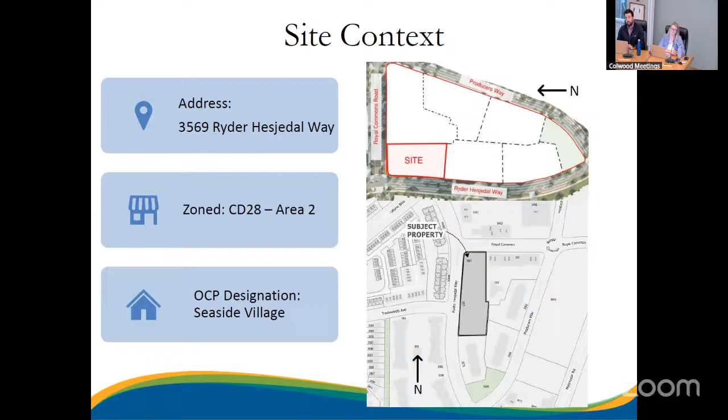So the proposal envisions the construction of a 77-unit mixed-use development designed to offer a diverse mix of housing options and ground floor commercial units along Royal Commons Road. Units will include 1 bedroom plus den, 2 bedroom, and 2 bedroom plus den units. The 2 commercial units will contribute to the active street frontage of Royal Commons Road and align with the intent of the Commons neighborhood.

Which is to be the commercial, social, and cultural heart of the Latoria South area. The building is proposed to be above 2.5 levels of underground parking, with a total of 88 residential, 13 visitor, and 6 commercial parking stalls.

The proposal fully complies with all parking requirements set out in the off-street parking regulation bylaw, as well as all requirements of the Colwood land use bylaw, with exception to maximum building height, which is subject of tonight's variance request. In addition to the variance application, the applicant has also applied for a form and character development permit for the building. Due to the variance request being associated with the overall building height, approval of the variance is required to make the current development proposal feasible.

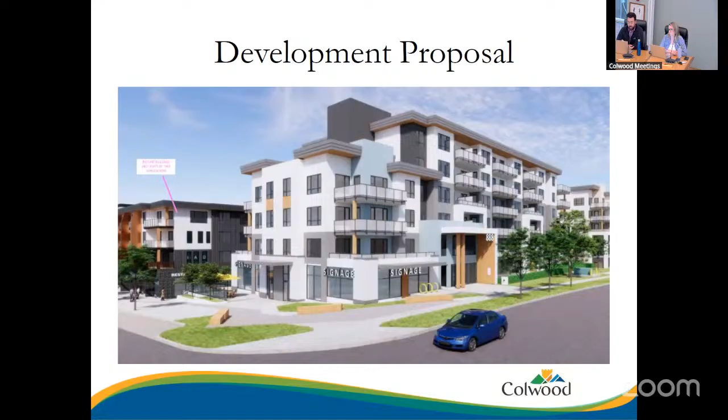Until that decision is made, staff cannot move forward with processing the development permit. As mentioned earlier, the applicant has also submitted a development permit amendment application to update the original Parcel B development permit and include the proposed Apartment E building into the overall site plan. This amendment would ensure that the new building is formally recognized within the established approvals for Parcel B, allowing for integrated planning and compliance with existing development guidelines.

Oh, sorry. Come on. Can you go back one slide, please? Thank you.

In terms of the official community plan, the property is designated Seaside Village and is located within the Commons neighborhood as set out in the Latoria South sub-area plan. The sub-area plan identifies the property as part of Area 2, a 2.7 hectare mixed-use precinct intended to support the adjacent retail core. Along the northern edge, the plan envisions a pedestrian-oriented streetscape along Commons Road, with ground floor retail and commercial uses and residential or commercial uses above. The plan anticipates building heights up to 4 stories along that northern edge and up to 6 stories across the rest of the site. It also identifies an overall density of about 3.0 floor area ratio, with potential for additional density where broader city objectives are achieved.

Overall, the proposed development is consistent with that policy direction. It provides the mixed-use pedestrian-oriented building form along Royal Commons Road and then steps back to 6 stories toward Ryder Hesjedal, which reflects the height framework established for Area 2 in the CD28 zone.

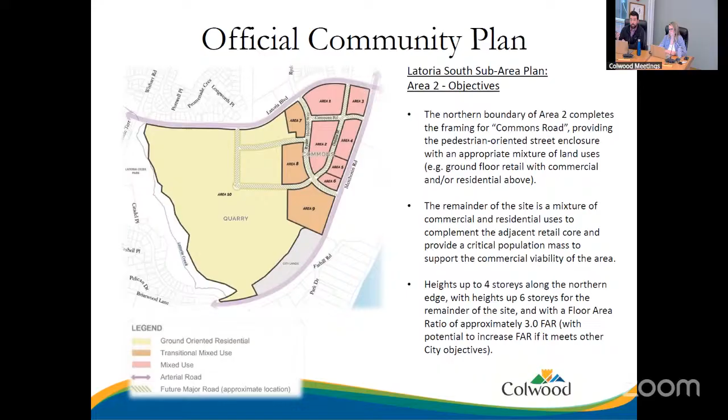So specifically, the variance request: the applicant is requesting to vary section 10.33.5.2 of Colwood Land Use Bylaw 1989 to permit an increase to the maximum building height for a mixed-use building from 15 meters to 24 meters. I'll just pause on this image here.

So on the left-hand side of your screen, that is the 4-story component fronting onto Royal Commons Road. And then at about 11 meters away from the property line, it steps back and then goes up into the 6-story apartment portion of the building.

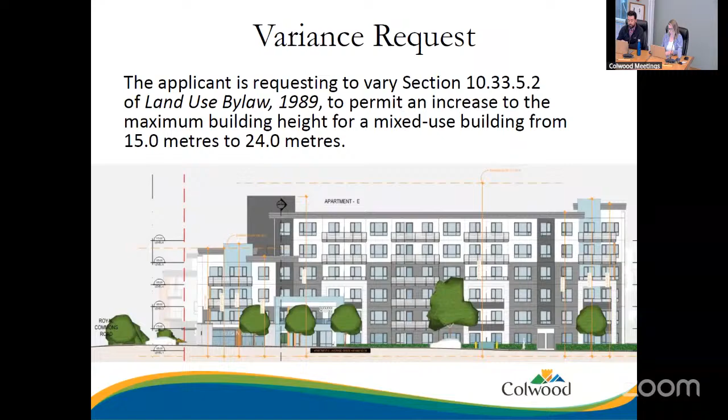So although the requested variance appears substantial, it's largely due to the building's mixed-use classification rather than the overall form or height. The mixed-use frontage along Royal Commons Road generally remains within the 15-meter limit, except for a small parapet reaching 15.44 meters, while the residential portion is stepped back and reaches 21.64 meters, which is well below the 24-meter otherwise permitted maximum for apartment uses in Area 2 of the CD28 zone.

So while the application technically seeks an increase from 15 meters to 24 meters for a mixed-use building, the added height is within the residential portion and in the area where greater height and density are anticipated in the official community plan. The proposal maintains a 4-story scale along Royal Commons Road and steps up along Ryder Hesjedal Way, consistent with the intent of the zone. The upper stories are set back well beyond the 1.5 meter minimum, reducing the perceived height from Royal Commons Road, aligning with the neighboring 4-story mixed-use building and supporting OCP direction for pedestrian scale and appropriate height transitions.

Facade articulation, a varied roof line, and individual unit articulation further reduce massing and add visual interest. Overall, staff consider the variance technical in nature, with the design mitigating height impacts while advancing the objectives of the CD28 Area 2 zone, the official community plan, and the South Latoria sub-area plan.

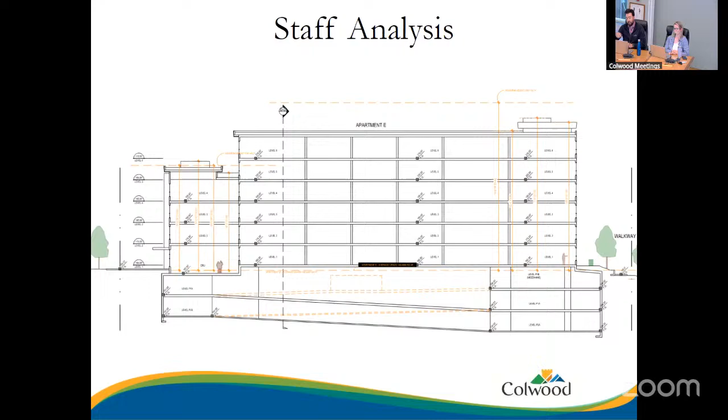In terms of public notification, a development notification sign has been posted on the subject property in accordance with council policy. The Local Government Act also requires written notice to be provided to property owners and occupants who may be affected by the proposed variance in advance of the council meeting where this decision will be considered. For this application, notice will be mailed to owners and occupants within 100 meters of the site before that council meeting.

At this time, I would like to introduce Matthew Davis, VP of Development with Path Developments, who has also prepared a presentation for you. I'm available to answer any questions prior to that or following Matt's presentation. Thank you.

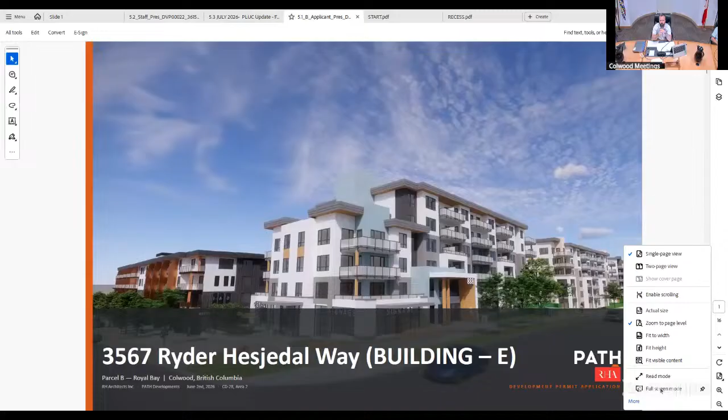Good evening, councillors, mayor, members of the committee and the staff. My name is Matthew Davis. I'm here on behalf of Path Developments. Since 2015, Path has built more than 1,000 homes, delivered over 100,000 square feet of commercial space, built parks, trails, public gathering spaces, and a lot of the infrastructure required to support Royal Bay's continued growth.

Building E is part of that vision. Our objective has consistently been to deliver complete communities where people can live, work, and gather. The intent is to complete this final building in a form that supports the pedestrian-oriented mixed-use neighborhood.

So before jumping more into the design, to explain the variance again: on paper, it relates to an increase in maximum building height from 15 to 24 meters for mixed-use buildings. However, we see this primarily as a classification issue under the land use bylaw, not a building form issue. Because the building includes ground floor commercial along Royal Commons Road, it's classified as mixed use and therefore subject to a 15-meter height limit. At the same time, the residential portion of the building is located behind this frontage and remains fully within the 24-meter height already permitted for apartment buildings in CD28 Area 2.

So by stepping the building and blending these height limits, we feel we do so in a way that keeps the commercial frontage within the lower mixed use scale and allows the residential portion behind it to align with the apartment height already contemplated for the area.

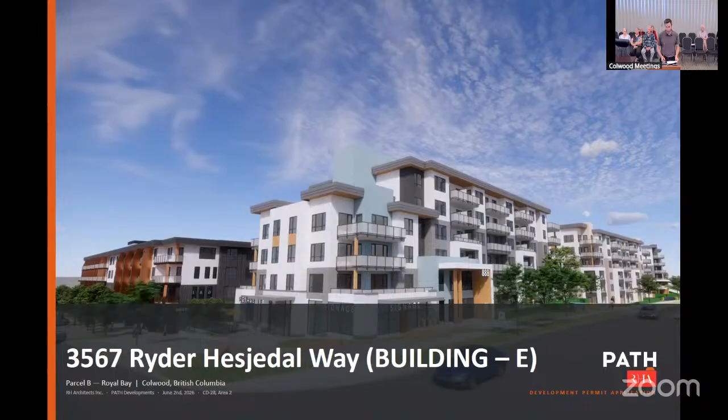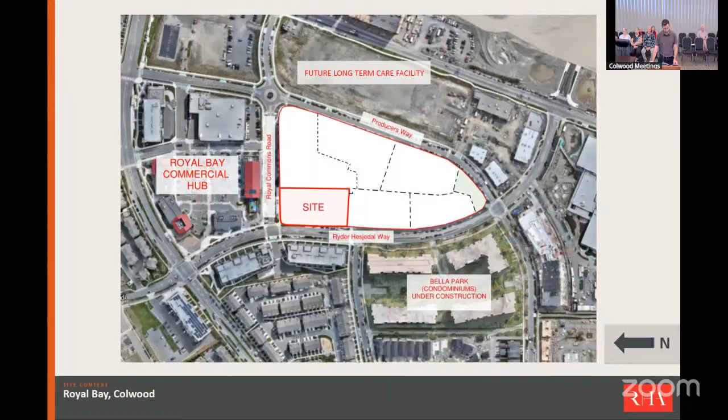As has been explained, this is a prominent corner at Royal Commons Road and Ryder Hesjedal Way, a transition between the commercial core and surrounding residential neighborhoods. The official community plan identifies this area as a pedestrian-oriented mixed-use district, and Building E has been designed with that vision. Here's a drone photo from May showing active construction, with the mixed-use building complete and the residential building to the east of the site under construction.

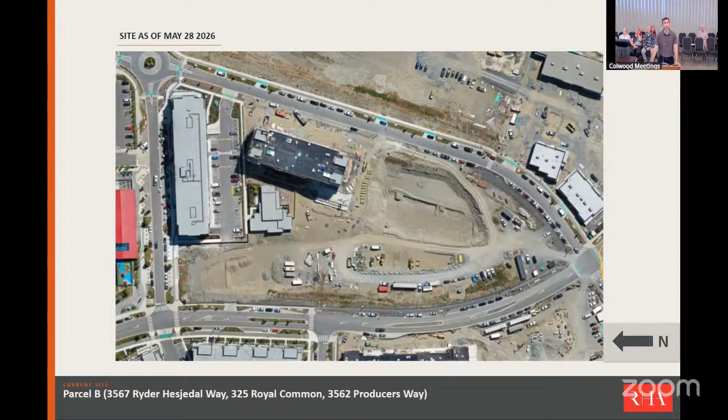The first application was submitted in September 2022. Since then, the mixed-use building, amenity building, and Building A have advanced through approval and construction, consistent with the concept that was reviewed and approved previously. The February 2026 amendment is focused on completing this previously approved concept by adding Building E.

It should be noted that the incremental unit count added to this site is 66 units, I believe, but it does not change the overall density for Royal Bay. We have 2,600 units that we are allocating, and as we develop each parcel, we allocate a portion of that density, so the total density for Royal Bay is not changing. Also, as staff mentioned, an FSR of 3.0 is permitted across this site, and I believe we're building to under 2 FSR in terms of total density.

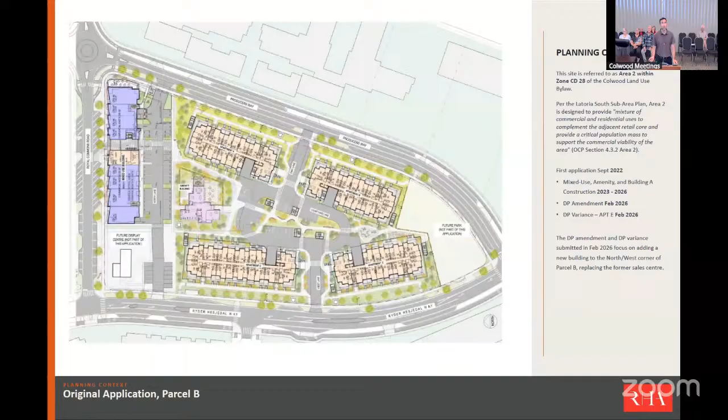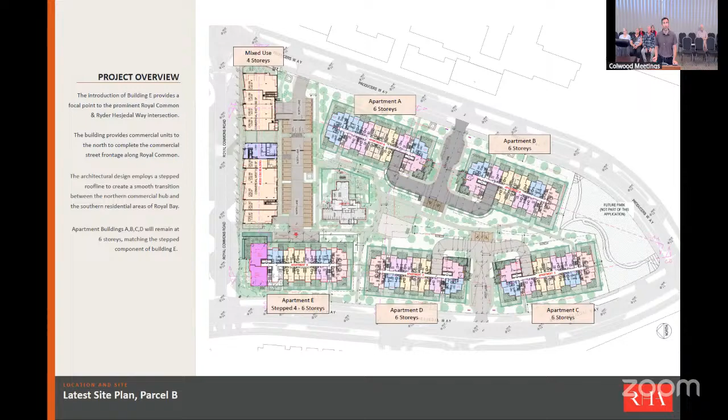You'll notice there on the corner, we pulled the building back to, I believe our setback is about 6.5 meters from Royal Commons. The minimum is 1.5. So we've created significant plaza and gathering space on that corner with this building. From this perspective, the building reads consistently with the existing 6-story buildings in that neighborhood.

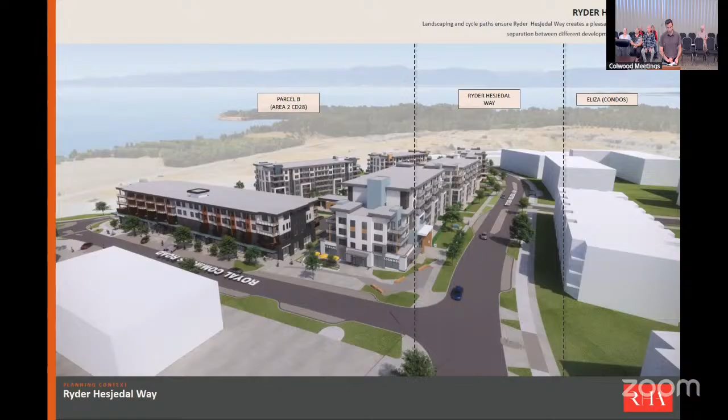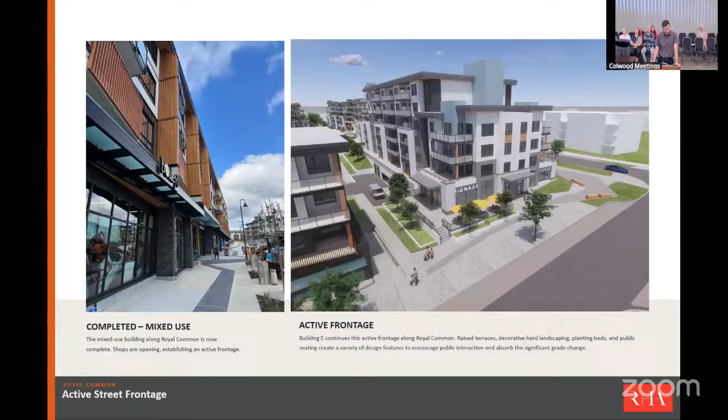Again, just the active frontage showing how it connects to the existing mixed-use building adjacent to it that we are currently leasing with commercial tenants. You can see the site follows the natural slope of the road, working with the topography to create a gradual change in scale. I think Matt took us through sort of where we stand versus the permitted height, with 15-meter height limit on the commercial portion and a 24-meter height permitted on the 6-story residential portion.

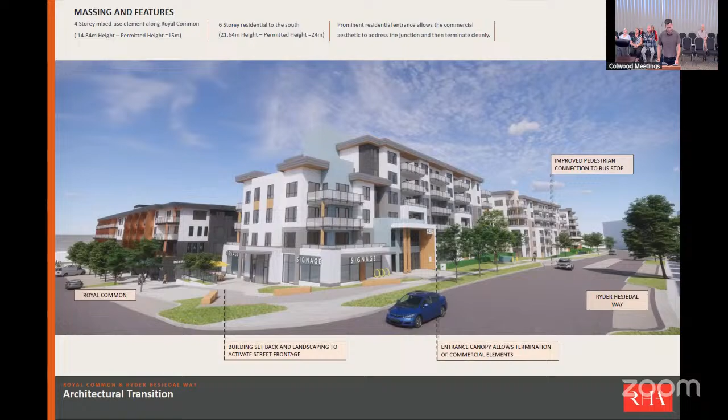Design and materials. So materials and colors are consistent with the previously approved buildings on parcel B. Durable, locally appropriate materials are used with complementary accent colors to provide architectural interest. This just ensures Building E is cohesive with the broader development while maintaining its own identity.

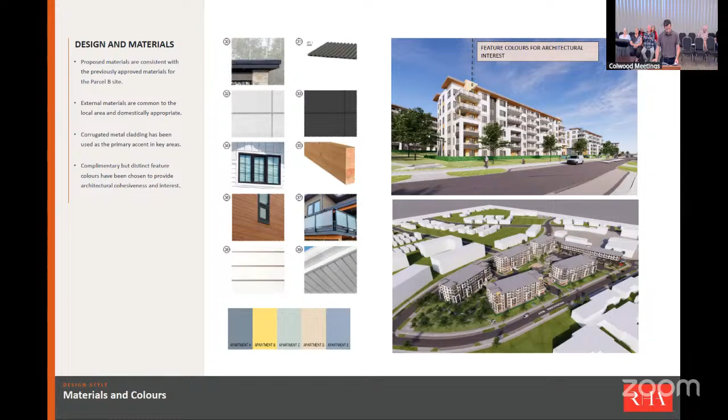All vehicle loading and services are provided from the rear lane. This keeps Royal Commons Road free of service functions and maintains a pedestrian focused streetscape.

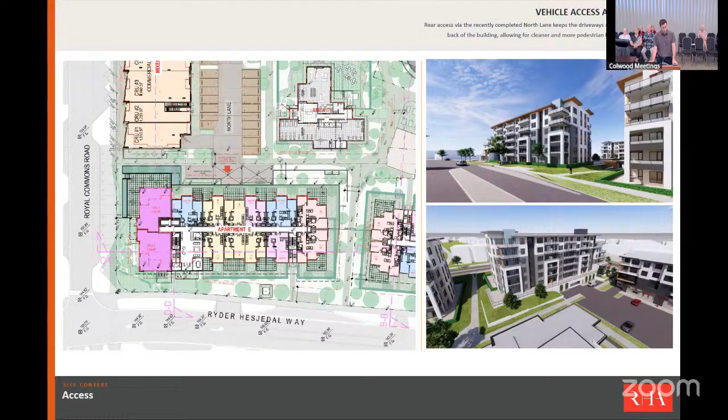So we proceeded with the proposed stepped mixed use option because it provides the best planning and design solution for this site. It balances the active commercial frontage along Royal Commons Road, the delivery of much needed housing, and an appropriate transition in building scale, while best achieving the intent of the official community plan for a pedestrian oriented mixed use neighborhood center.

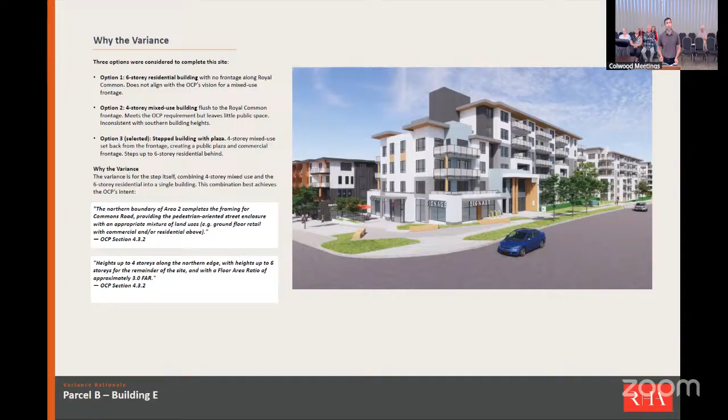Again, just a review of the building height. I think we've gone through this in detail. And at this time, happy to answer any questions about our presentation.

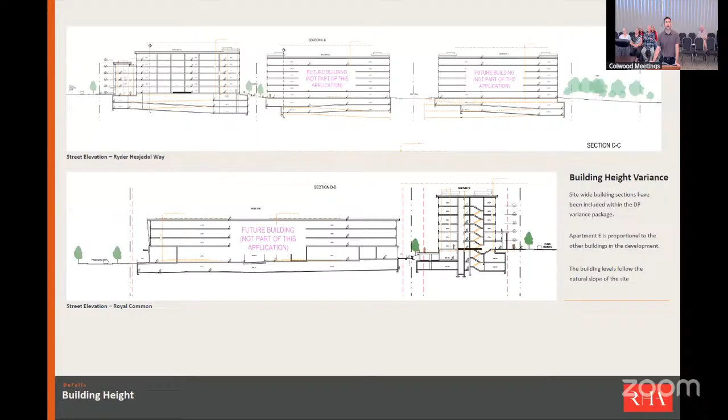Thank you very much. I'd like to really understand the site first and then establish some timelines that went before. So in the current approved development, the DP 22-022, does building D of that sit on part of this site?

Perhaps to staff on that. Through the chair, thank you. So currently, it is unsubdivided, so the application does kind of sit across those parcels. But to be clear, I just wanted to clarify on a point in my presentation, just because it was kind of detailed and confusing. So there's the original development permit for parcel B. This site, or this building, would be considered separately from that. So the amendment that they've proposed is actually shrinking the one building to accommodate this building, but this building is being considered separately, and it would be subdivided into its own parcel that would have a different address.

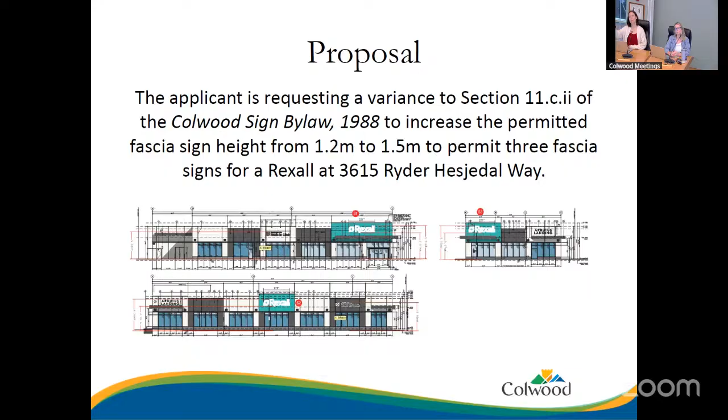So for some site context, the subject property is located at the corner of Producers Way, Ryder Hesjedal Way, and Metchosin Road, with the subject building fronting Metchosin Road. The locations of the three proposed fascia signs are highlighted in blue on the image provided there.

The subject property is in Area 6 of the CD28 zone, as well as the Seaside Village OCP land use designation. This area features a variety of uses, with the subject property containing commercial uses as well as a proposed daycare. The surrounding lots include institutional uses like the proposed long-term care home to the north, and the Royal BC Collections Facility under construction to the south, as well as a variety of multifamily residential developments and park space.

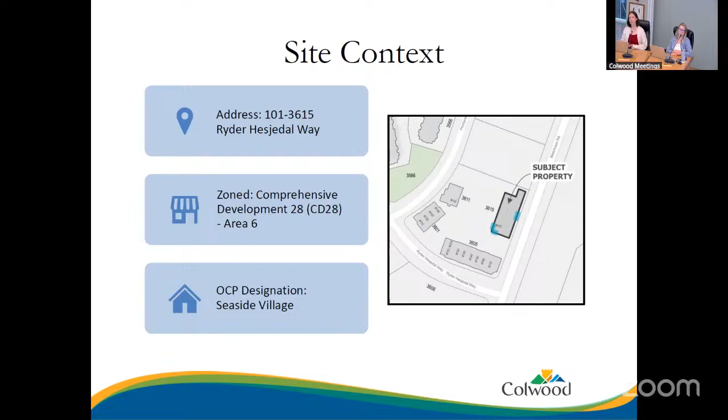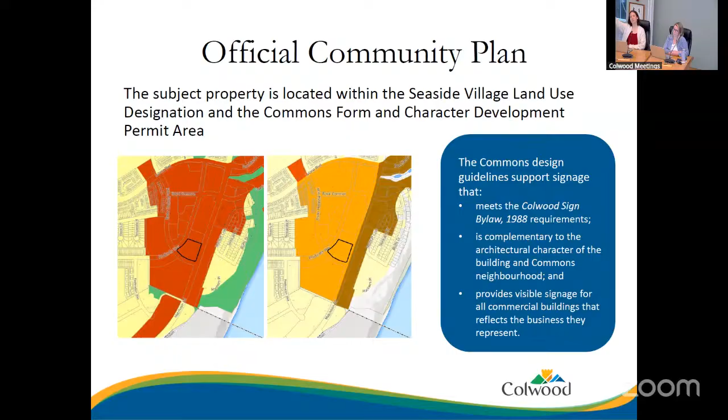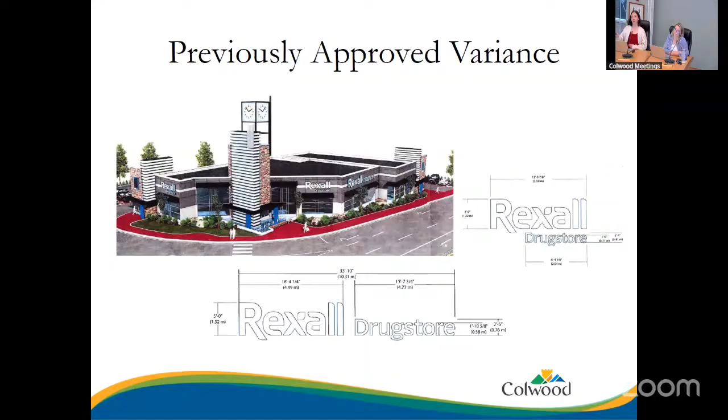The Colwood Sign Bylaw sets a maximum fascia sign height of 1.2 meters, and the proposed fascia signs are 1.5 meters, exceeding this permitted height by 0.3 meters. The sign bylaw also sets regulations for things like sign area and location, all of which are met by the proposed fascia signs.

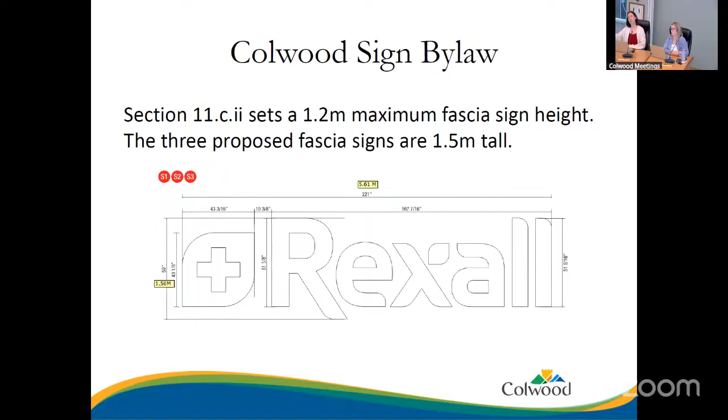In the image here, you can see a rendering of the dimensions of the proposed signage. The image at the top of the slide shows the proposed signage on the right, as well as the elevations included with the approved development permit on the left, which includes signage with a height of 1.2 meters. While the proposed fascia signs will be taller than others in the development area, this is not expected to have a large visual impact and will still align with the overall character of the development.

Overall, staff are supportive of the variance request. The proposed signs align with all of the bylaw regulations other than the fascia sign height. They align with the goal of being complementary to the buildings in the area, and they provide clear signage for the businesses they represent. The applicant has already taken steps to reduce the proposed signage to better comply with our bylaws, and has noted in their letter of rationale that further reductions could start to impact the clarity and visibility of the sign. The increase in sign height is seen as relatively minor and expected to have limited visual impact.

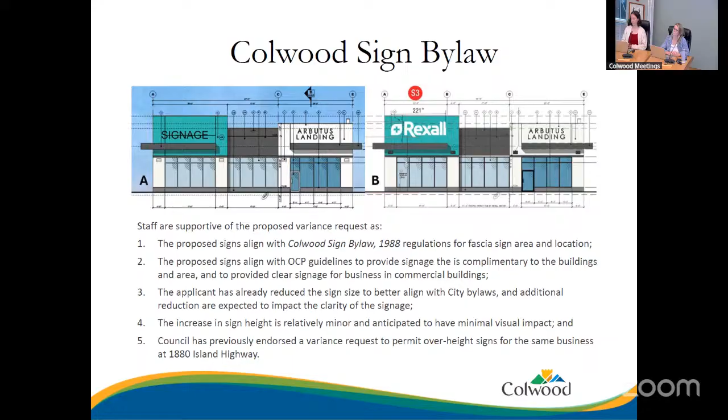Finally, the City of Colwood has also previously approved a variance to fascia sign height for a retail unit at 1880 Island Highway. In terms of communication, development notification signs have been posted on the subject property on all three street frontages. Additionally, notification postcards will be sent to neighboring properties within 100 meters of the subject property prior to council's decision on the variance request.

So some options and alternatives for committee today. Committee may consider recommending to council one of the following options. Option one is the staff recommendation that the variance be approved, which would have the effect of increasing the permitted fascia sign height from 1.2 meters to 1.5 meters. Alternatively, committee could recommend that the DVP be deferred for more information, that the DVP be denied, or another option as determined by committee for council consideration.

So thank you for your time. I'm happy to answer any questions regarding the application. Additionally, the applicant, Ryan Matthews, is also here virtually tonight and is able to answer any questions.

Thank you, Kaitlyn. Are there any questions from the committee at all? Don't see any. I'm just, for the record, noting it's pretty consistent with precedent. As you indicated, these are smaller even than what we've seen at 1880 Island Highway. It's the anchor tenant on an arterial on Metchosin, and then on the corner of Ryder Hesjedal opposite the museum. So I can't really see any barrier here. I suspect I'm not alone.